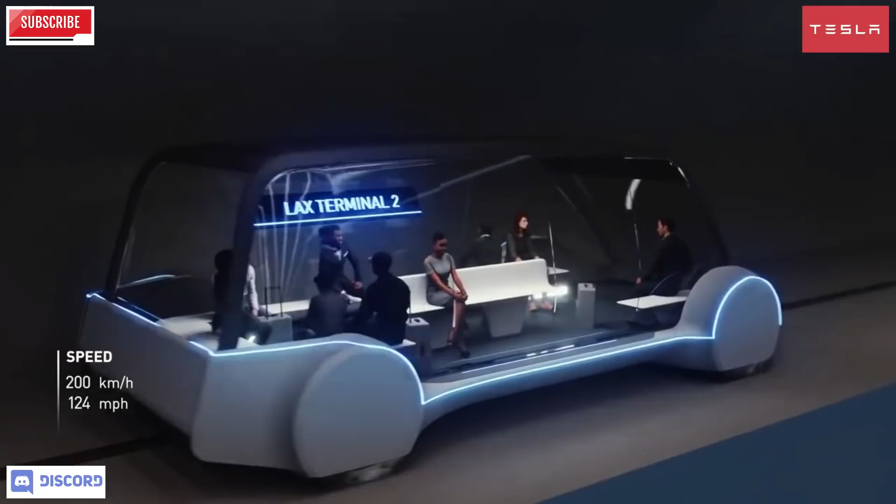I'm coming to you today with what could be my most explosive video of all time. It is a comeback video, and I am responding to a video that was made about The Boring Company by someone you may well have heard of. Let's have a look.

Yes, I decided that I needed to respond to this video. It's very important that I respond to this video in a very objective and fair way. Look at the information that has been provided by Thunderf00t and critique the areas that I believe are either misconceptions, mistruths, or just plain wrong. And I'm going to do it in a very, very fair way. Essentially what I'm doing today is I am poking the hornet's nest.

I have thought about this for a long while. Is this a good idea? Because this man here is a dangerous man. And in fact, I actually enjoy watching a lot of this guy's videos. You may have heard of him. His name is Phil Mason.

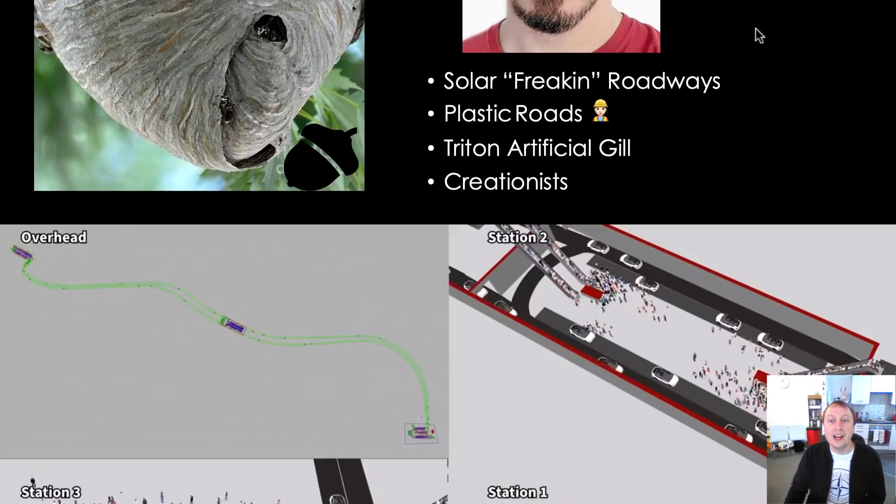Solar freaking roadways, what a terrible idea. Plastic roads, even worse. Triton Artificial Gill, and all his videos on creationists, which I really quite enjoyed. But he is not a fan of The Boring Company or Elon Musk, which is a great shame, really, because you know, he's a scientist, and you'd think that he might have some appreciation for what Elon Musk has been doing the last sort of 20 years or so.

So we look at the video. He says various things, and he shows this video here of the system, a simulation that I have seen on Twitter, but I've not actually talked about. So first of all, I looked at this and I thought, oh, there's that simulation that Phil Harrison produced on YouTube. And I looked at it and I said, oh look, there's, let's just mark it up.

Here's some Model X's. So straight away I can see from this that this is the second iteration of the simulation. So this is not the one that I have talked about, and this is not really what the system is. This is a stress test involving some modifications to the system, so it doesn't actually exist in reality. It's just a stress test. That's essentially what it is. So I've not really talked about this system because I just don't think that it's a good idea to really talk about theoretical modifications to systems.

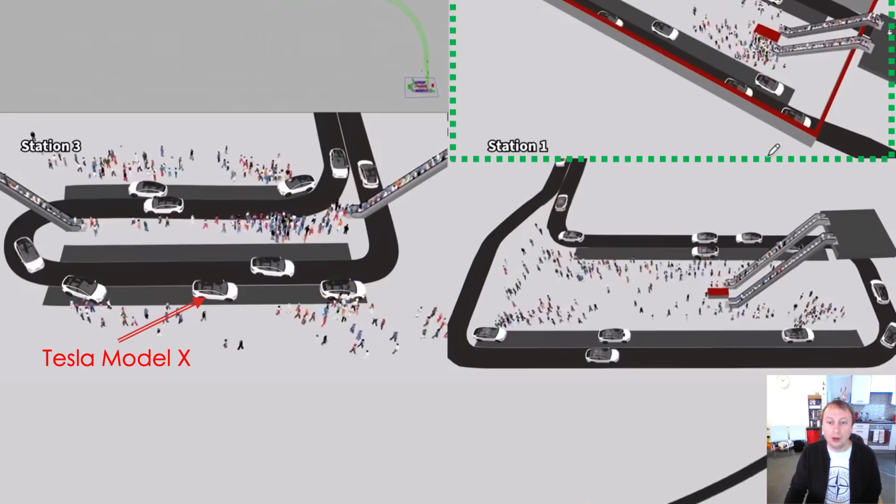What we should be talking about is what is actually being built in Las Vegas. So yeah, if you look at this one, as you can see, there are lots and lots of people here, lots of Model X's, and you've got 1, 2, 3, 4 escalators. Well, this is not the system that I was talking about in my video.

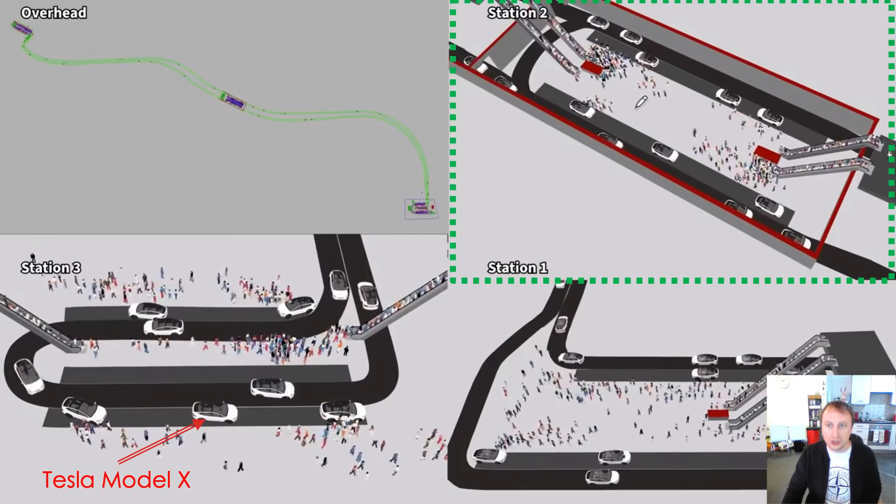And then Phil Mason has quoted me in his video as praising this system, which I have not done. I have not done that. So straight away he's misquoting me, because you can tell that this is a totally different simulation. These vehicles here are Tesla Model X's. It's a totally different vehicle in the system. The layout of the system is slightly different.

The speed limits in the system are totally different. So it's a mistruth what he's stating here, that I am praising the system that he is quoting. It's a totally different simulation. And if you don't believe me, here it is in black and white.

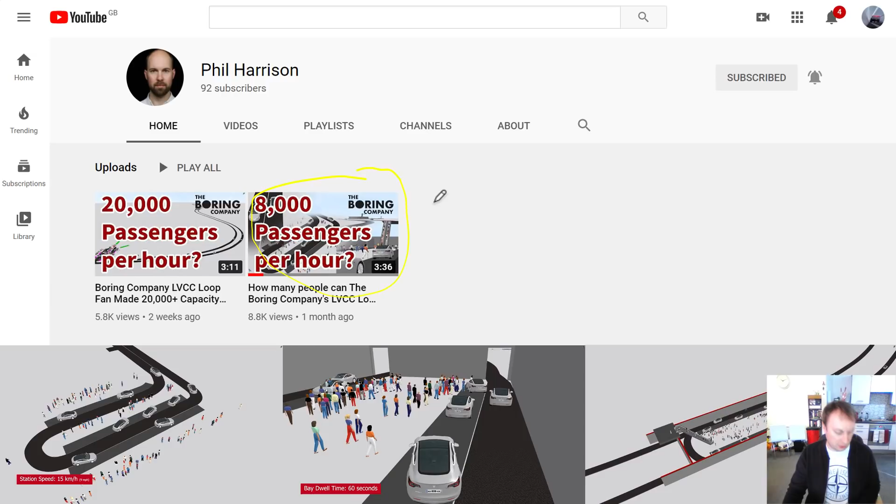So this is the system, or the simulation, that I have been talking about. And he's been talking about this one. So straight away, Thunderf00t is getting a little bit confused. Maybe he looked at that and he assumed they were both the same. I don't know, it might have been a simple mistake like that. Maybe he's trying to bend the truth.

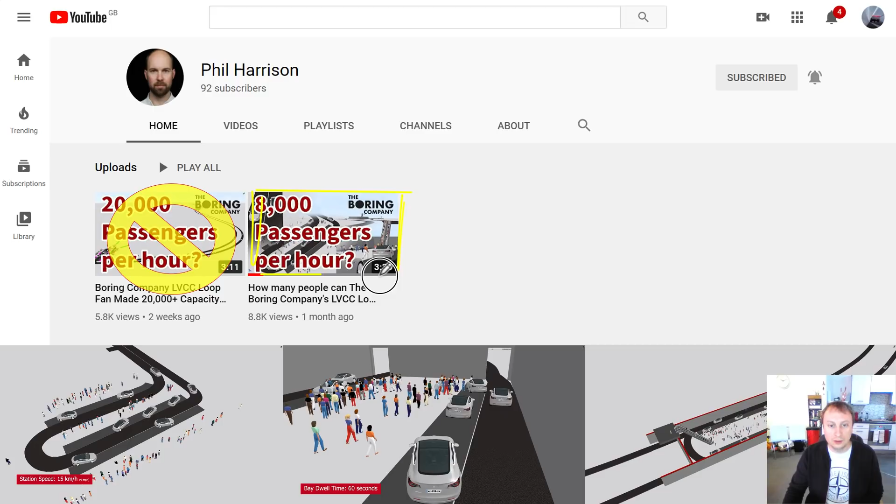I really don't know, I don't care really, because I have been talking about this system here. It's a totally different simulation. Okay, so we've got that out of the way.

So we're watching the video and I've noticed my face has come up and I'm like, I'm not sure really why I'm on this video. But then he brings up the simulation and he drops it onto Google Maps. And I'm looking at it, I think, okay, that's reasonable, that's 98% correct. There's a few, the designs have changed slightly. You're looking at something that's not quite up to date, but it's fairly up to date.

So that's good. So he's looking at this, and then he does something quite bizarre, really quite bizarre. He drops the marker on this road over here. He said, let's have a look and see if there's something we can take from real life and just compare it.

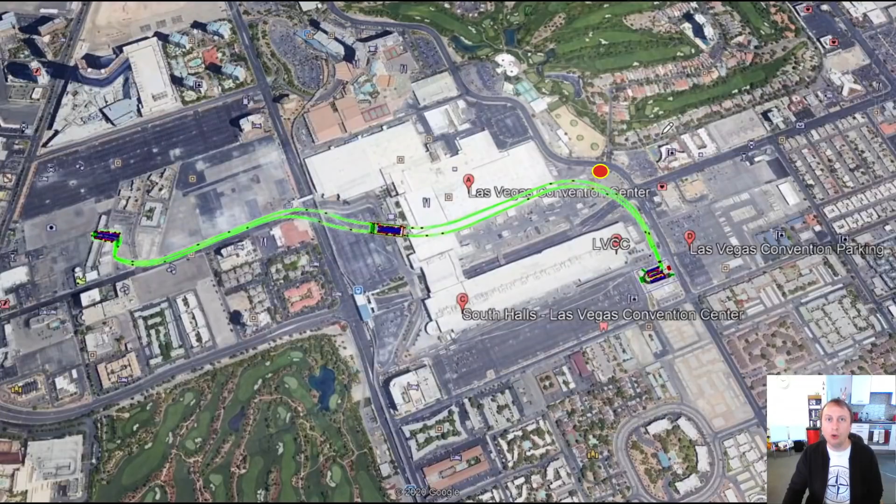And I just thought, are you comparing this road to this road? It's nothing the same, it's totally different. Look at the shape of the road here, it is far from straight. You're going from one curve into another curve. You've got a junction here, you've got a residential estate here. It's a very, very unfair comparison.

So here he is, he's put that on there. Where is our actual route of the Las Vegas people mover? Well, it is here. And then he drops his marker over here on Joe W. Brown Drive.

Well, that's not really a great example, really, because you've got two lanes of traffic. There's no separation in between them. There's lots of reasons why you wouldn't be driving fast on this road. And as you can see here, there is a junction where people are going to be turning left and right. It doesn't really bode well to have a high speed limit in this particular area. So it's just a poor example of a road to compare it with.

Then, this blows my mind, this bit. He starts quoting the speed limit sign here. Well, the speed limit sign generally doesn't come about because people do a study of what the maximum velocity you can go down this road at. It's nothing to do with that.

They're working out the worst case scenario. What they're looking at is what happens if there's low visibility, what happens if there's a truck or a bus going down this road, what happens if the road is icy, what happens if there's pedestrians crossing the road, what happens if there's cars going through red lights and things like this. So the worst case scenario, all these things are potentially going to happen, so they take the safe approach and set the speed limit at 25 miles per hour, which is probably sensible for this particular residential area.

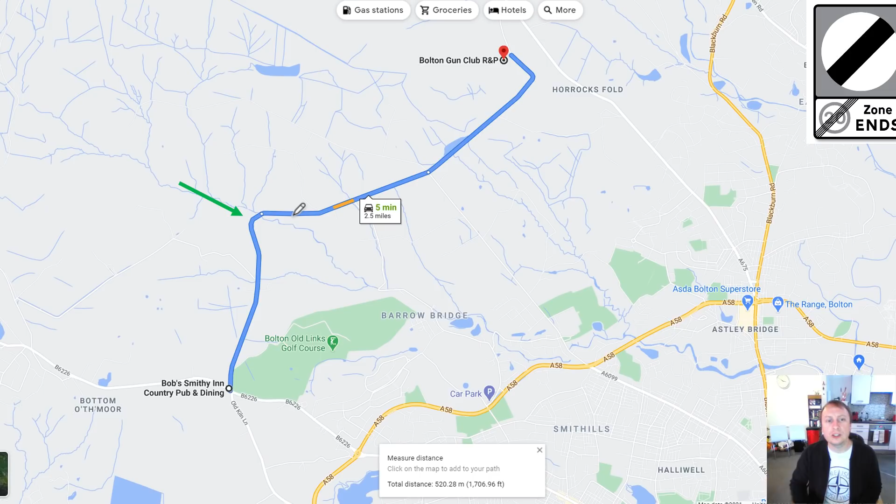So first of all, we need to calculate what is the radius of this curve here? Well, it's quite difficult to pull off Google Maps, although Phil Mason kind of did that in his video, so we're just going to copy what Phil Mason did. So this is Walker Fold Road in Bolton. As you can see, I've dropped a square on here, and each side of this square is 45 meters long. Then I'm going to calculate the radius of the curve here on Walker Fold Road.

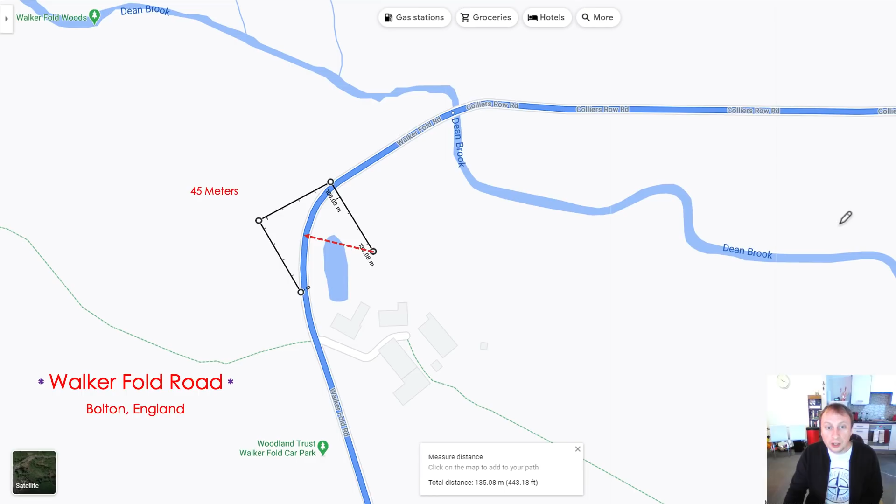Then I'm going to tell you about the speeds that I go around this corner, like every other week, if not more often than that. So looking at this, we dropped our square on there and calculated the radius of that curve. I'm pulling off around 41 meters, but just to be safe, because the markings are not quite as accurate as I'd like them to be, it's around 43 meters in radius for this particular curve. So it's not excessively tight, but it's fairly tight. It's a good curve, and I go around this fairly often, and it's national speed limit along this area of road.

How fast can I go round this road? Well, I did this two days ago. So what I did was, first of all, I went round it at what I thought was a sensible-ish speed. So I went round it around, let me change my pen.

So I did 36 miles per hour to begin with. That's not great, is it? I went round that corner, 43 meter radius, at 36 miles per hour.

So then I tried 40 miles per hour. Absolutely fine, I went round the corner just fine, no issues with the back end of the car. My car is not some kind of sports car, it's just kind of your general run-of-the-mill sedan.

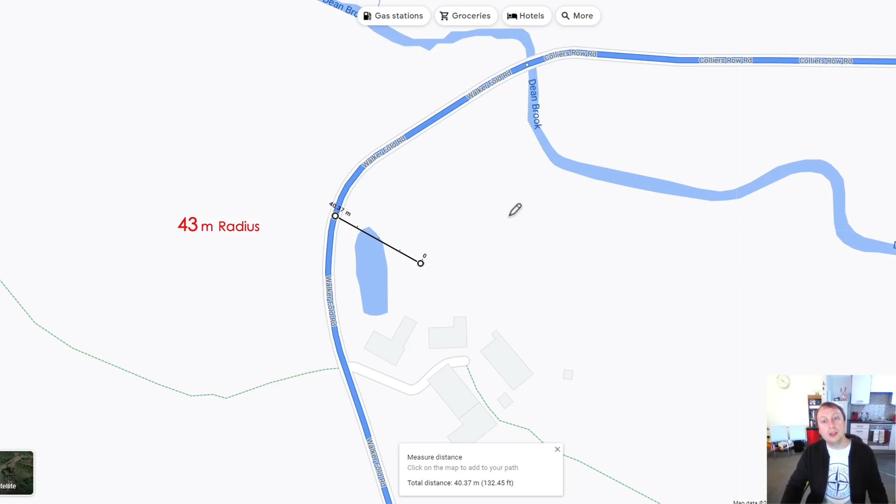So I think for a corner like this, around 42 miles per hour is not too bad. 42 miles per hour at a 43 meter radius - you can pull off numbers from that. I think 42 miles per hour for this radius of corner is very safe, and I'd be happy doing that. And remember, the actual system here in Las Vegas is going to use a very high performance vehicle. The tires on that vehicle are going to be super grippy, and the actual road deck is going to be very, very dry.

When I was doing these tests 2 days ago, it was icy and wet, so maybe I could go a bit faster, but I didn't want to risk it. Also, the traffic is segregated and the route is known, so the speeds you could do in this system are going to be quite high, even compared to motorway standards.

So let's have a look at our route map. Here's our updated route map, the most recent one. As you can see, I've drawn our triangle, our square here, which I'm going to extend like this. So I've drawn our square on here, and what we want to do is calculate that there.

We want to calculate what the radius is of that curve - is it going to be more than the curve at Walker Fold Road? That's the question. I'll have you know, it's a lot more. A lot more. So when Phil Mason comes on and says, hey, you can't go around this corner, it's going to be very tight and very uncomfortable, and it's potentially dangerous, and I'm not sure they're going to do it...

Well, when he says things like he's not sure, he actually is not sure. I can tell you the numbers today, and the numbers today are very, very good. So let's first work out the radius of this corner. It's about 260 meters vertical, and then we do another 260 meters across here, and that drops us on our square here, our perfect square at the Las Vegas Convention Center.

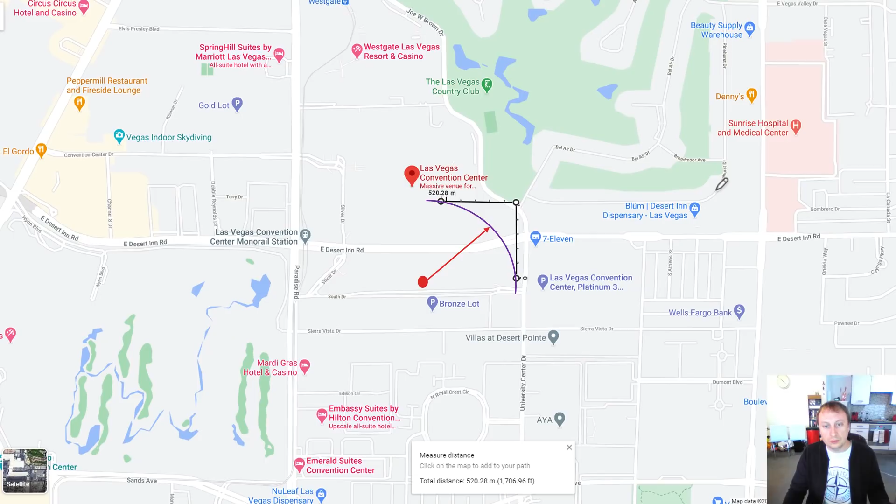So what is the radius there? What actually is it? We know we can go around the corner at 42 miles per hour - that's a 43 meter radius. This is a 260 meter radius, and I'm very confident that's accurate to within 2 to 3%. So it's somewhere in the region of 254 to 266, something in that ballpark.

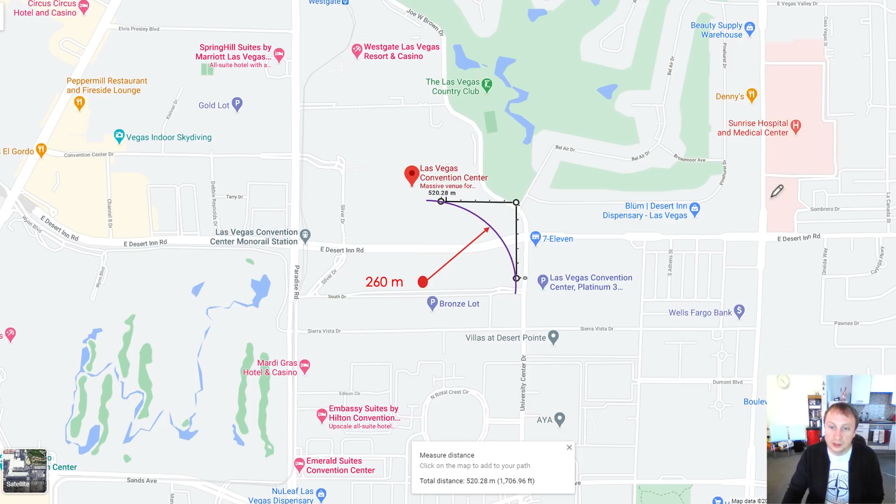So 260 meters - that means you're going to be able to go around the corner at quite high speeds, because remember, you've got a high performance car, high performance tyres, so they're very grippy, a very grippy surface, and you don't need to worry about weather conditions because the tunnel road deck is going to be very, very dry. So all those things add up to some high speed running through this system.

Here's a quick criticism of this system, because I'm going to try and be objective and fair here: this system is not long enough. I would much rather have a system that's about 1.1 miles long or 1.4 miles long - there's a lot more you could do with a system that long. That would increase the top speeds a lot more, and you'd do a lot less braking, so you'd have less wear and tear on the brake discs. Even with regenerative braking, you're going to have to use traditional brake discs on this system.

The problem is no one on YouTube and no one in the media has any idea what the top speeds are going to be on this system in Las Vegas. Today, I'm going to tell you what the speeds are going to be at various points. I don't know if you can see these dots here - these little dots indicate vehicles.

These vehicles are traveling through the system. We've just taken a snapshot of the actual top speed that these vehicles have reached at this point in the system. So these can be individual vehicles all using the system at the same time. It doesn't really matter. For this example, and I'm going to be crystal clear with you, this example involves going from station 1 here to station 2 here.

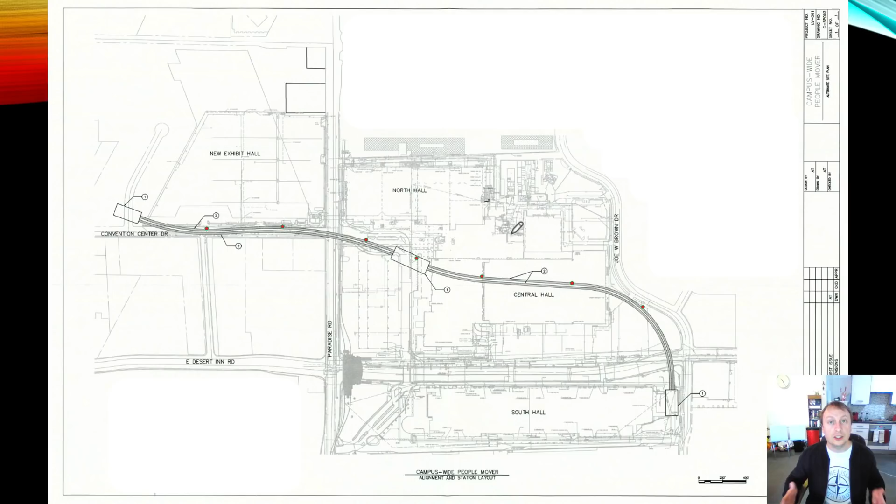Passengers are fed into the vehicles via stewards. So you've got 4 or 5 passengers, and they're loaded into the vehicle. Once that's completed, the steward clears the vehicle to leave, and then it has a window to exit the station in a safe way without worrying about cars going through.

So we've gone a bit off track there, but I'm going to tell you now about the various speed limits at these various points, okay? This is the direction of travel. It's not stopping at station 2. Here are our indicators where the cars are.

This is what the speeds are going to be at these various points in the system. As you can see, it gets just beyond motorway speeds. The reason it's not super high is because the system is quite short, unfortunately. This is the best that you could do. If this was done with a train, for example, and I'll come on to trains in a moment, the top speed in the system would be around 30-35 miles per hour, maybe 38 at best, because trains have to stop and start all the time, very heavy, and acceleration's not amazing.

So using Tesla vehicles is the best way to run a system of this size. As you can see, when this vehicle is coming around this corner here, in this area, it's getting up to 48 miles per hour. As it's coming out of the corner and hits this straight here, it's going to be able to get up to about 68 miles per hour, 65 miles per hour, that kind of ballpark.

It maintains that speed along here, and then as it gets up to here, it begins to slow down. As it enters the station, its speed is limited to 22 miles per hour. It's passing through the station, so it's not going to be going excessively fast. In the event that something goes wrong at 22 miles per hour, the vehicle can stop quite quickly.

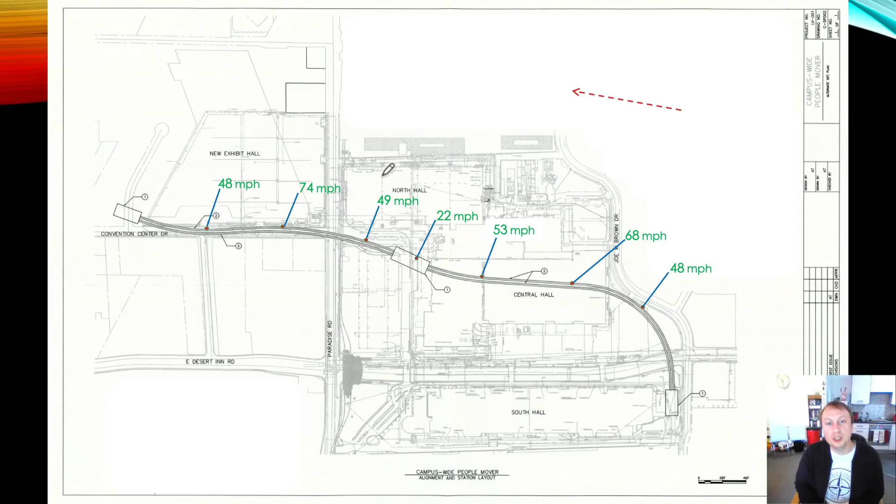Okay, so I think that Phil Mason doesn't talk about speeds - he doesn't mention... in fact he does actually. He puts on his video title that maybe 40 miles per hour is possible. Well that's fucking stupid, because as you can see we're going 48 there, 49, 53, 68.

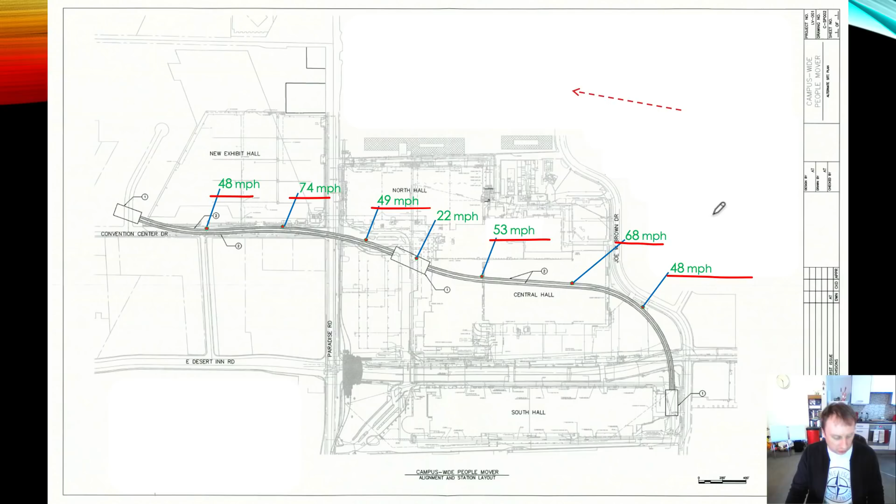So and 48 here as well. So most of the system is well above what he's predicting it will be, and there'll be lots and lots of vehicles going through the system at any one time. So we've dispelled that myth - it's a fallacy that the curves in the system are restricting the speed to very low levels. We know that now based on what I've just told you.

Now he puts this graphic up, and I have a lot of problems with this as well. First of all, how would this fit inside the Las Vegas loop system? So the platform at Station 2 is about 400 to 500 foot long, maybe slightly - let's say 450. This train is a lot longer than that. Each one of these carriages is 80 foot long, maybe 70 foot. So you'd have to extend that station.

Also, you're never going to run a system with one train. How would you run a system with one train? You'd at least have 3 trains. So these numbers are not really too accurate.

Another thing to remember is that one car can probably drive through this system twice before this train has even got to the end of the track, almost. Because you've got to remember, these trains take a long time to accelerate. They don't turn around - they have 2 driver's cabs, one here and one here. So when you get to your end destination, you're straight away going to lose 45 seconds. The train driver has to get out, walk all the way down, set up his cab, check his systems, open his window, and by the time he's actually put his key in and started the train, that's 45 seconds gone.

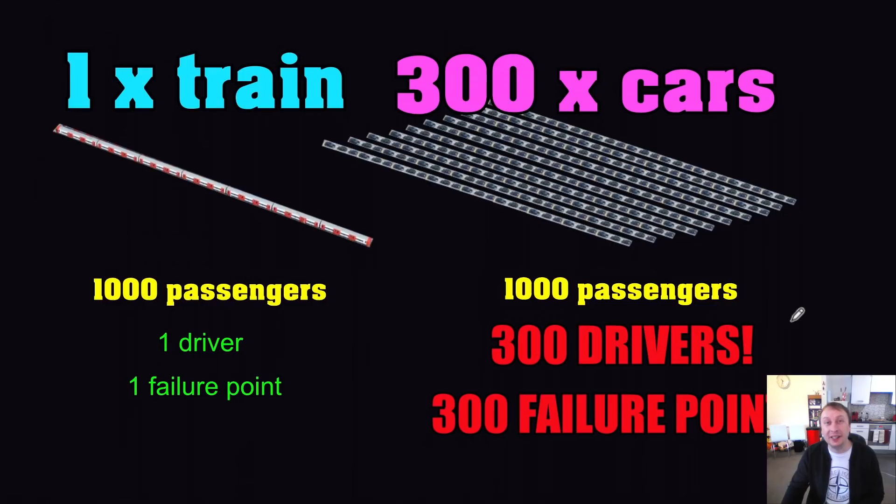And when they do occur, they may be months and months apart. So again, I'm not sure that's a great way of looking at it. But I can understand that yes, cars can go wrong, things can happen, and you could potentially have issues. But it's going to be so rare that it's not really worth factoring that into your argument, to be frank with you.

So what really are the numbers here? If we were going to compare it, if we were going to do kind of a train system that compares with what the Las Vegas loop is attempting to do, you'd probably divide this train up into maybe you'd do that, and then you'd add an extra carriage on as well.

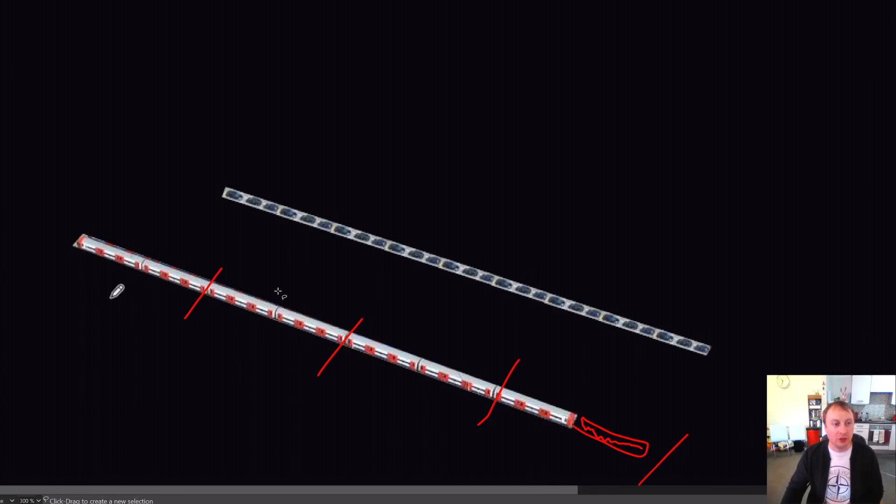So you'd have 4 trains. So really, in reality, if you're trying to compete with this and you're trying to do it with trains, you'd have 4 metro trains or 4 trams. So you'd need 4 drivers.

Yes, I know these vehicles initially will technically have someone sat in the driving seat. They will not be driving the vehicle very much. It will be on autopilot 98 to 99% of the time. In September of this year, autopilot will take over all driving within the Las Vegas loop. That's a well-known fact, that drivers will not be needed after September.

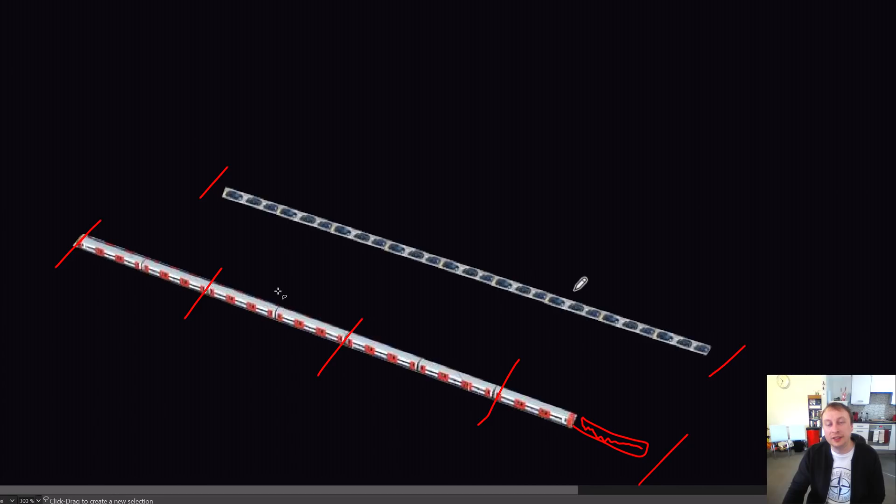So let's just assume that it is September and all these cars have autonomous systems installed, level 4. Well, really, you only need around, let's say 72, let's say for safety, let's say 74 vehicles. But you'd need 1, 2, 3, 4 trains. So again, that is a much more fair comparison.

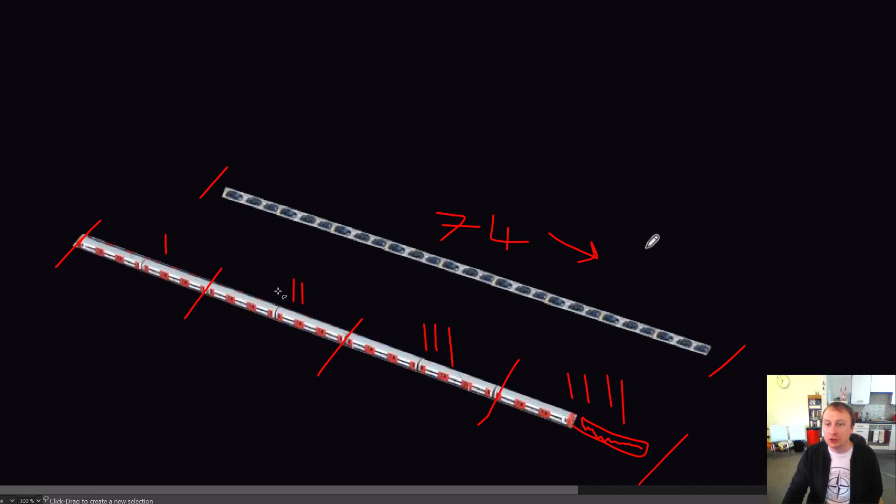How do we get this 74 down? That's another good question. How do we get it down to around 50? So that would be a better number for us, wouldn't it?

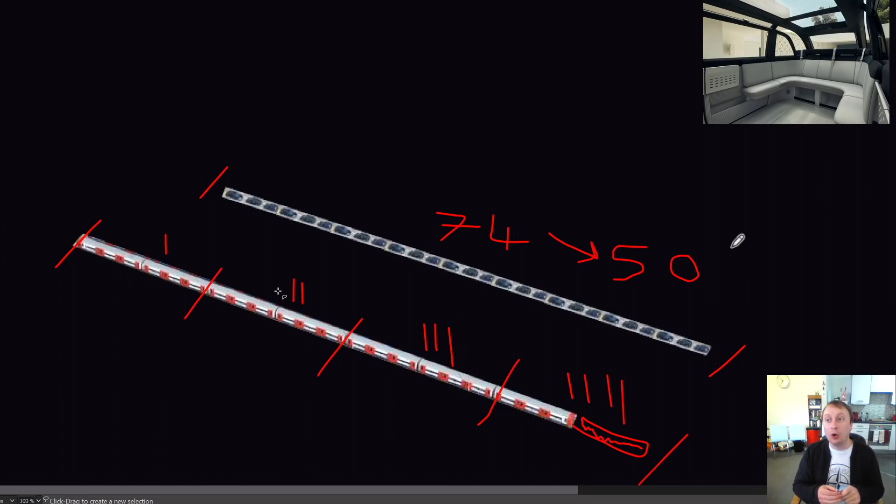Well, what you do is you introduce a vehicle with more seating. This is an example of a vehicle that I've shown in the past, and potentially you could have a vehicle that seats 8, 9, maybe 10 passengers, and that will be developed in the near future with nice doors like this so you can get in at the same time.

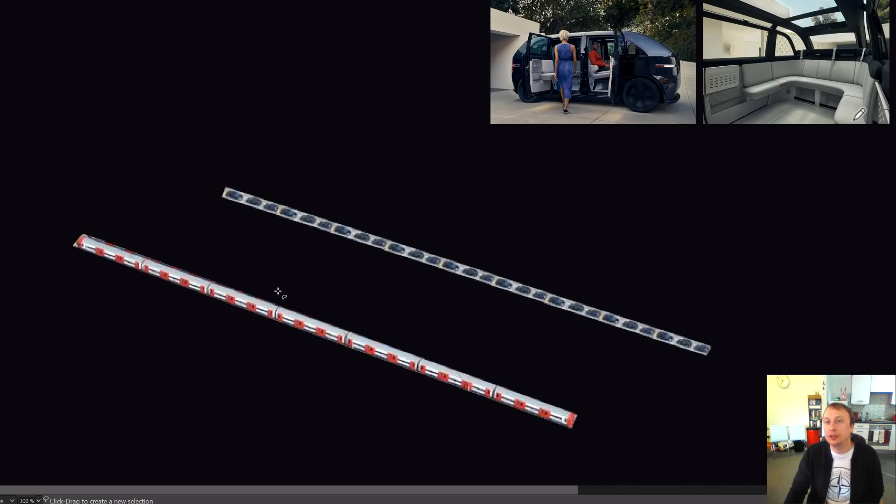It's not great. It's not great. I'm not going to lie.

So I don't really like that. Then he quotes, I'm really getting kind of fed up of having to explain to people that this article is total, utter rubbish.

Regulations are there to protect people, but regulations can be circumvented. If you can prove that the danger is not there, and there are applications within that regulation to go around certain issues, then these kind of idiotic statements, it's not true.

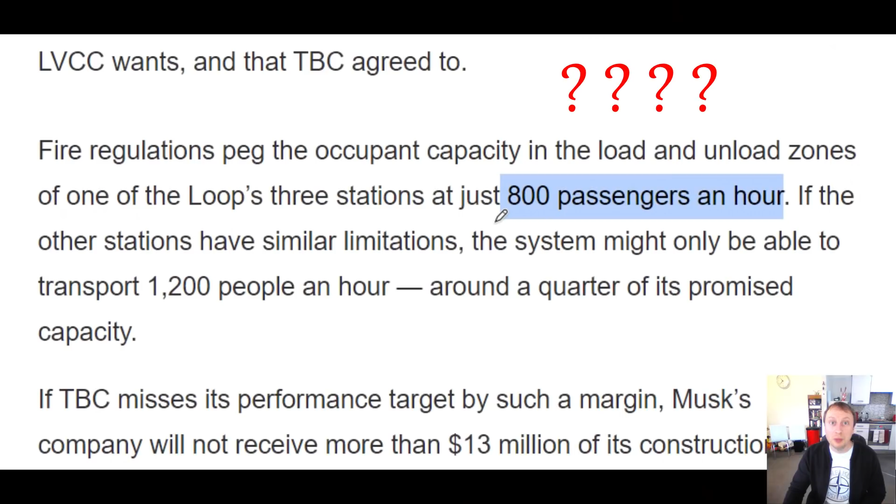That these regulations do not apply to the Las Vegas loop, and they have not been applied because there's no reason to apply them. And the main reason is 2 of the stations are open air, so there's no possibility of anyone breathing in smoke.

Also, in the event that a vehicle does catch fire in the tunnel, there's a massive sprinkler system, and people can just reverse the vehicles, because after about 20-30 seconds, this is going to put out pretty much any fire, and this thing can go for a full hour, dropping gallons and gallons of water onto the car.

I'm not worried about flashovers, I'm not worried about fires, and I'm not worried about regulations that don't even apply to the Boring Company system in Las Vegas, because that article was total FUD.

It was not based on reality. It was based on one person's opinion, and those regulations are not being applied, and we know they're not being applied to the loop system in Las Vegas. And they're not necessary. Why are they there? What is the point in saying they must only have 800 people when there's no risk of fire, because all the possible ways that you can eliminate the threat of fire have been taken?

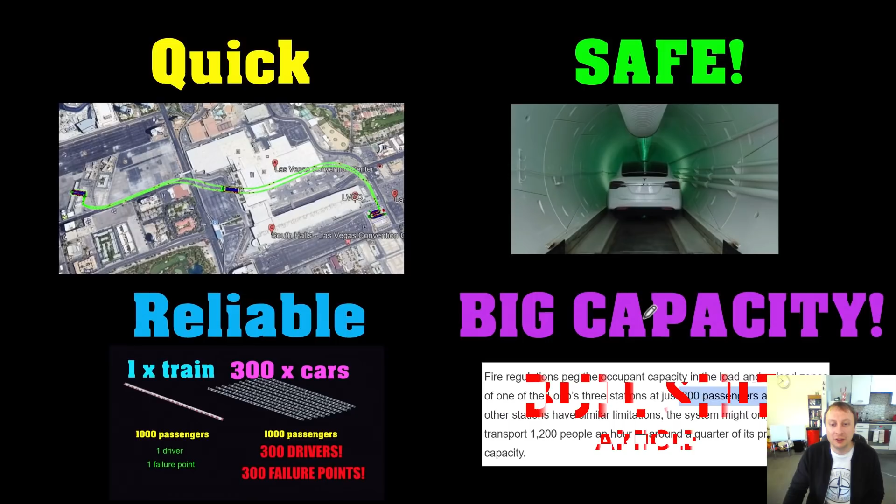So anyway, it's silly. So then this comes up, and this is just silly again. I don't know what to say to this. It is quick, it is safe, it is very reliable, and it meets the capacity requirements of the Las Vegas Convention and Visitors Authority.

They have agreed that we want a capacity of 4,400 per hour. So the Boring Company built a system that meets the requirements. It's doing what the customer said. We want 4,400 per hour. The Boring Company said, here you go, here's 4,400 per hour, and we gave them that. We don't need to give them more than what they're asking for. So let's just address this.

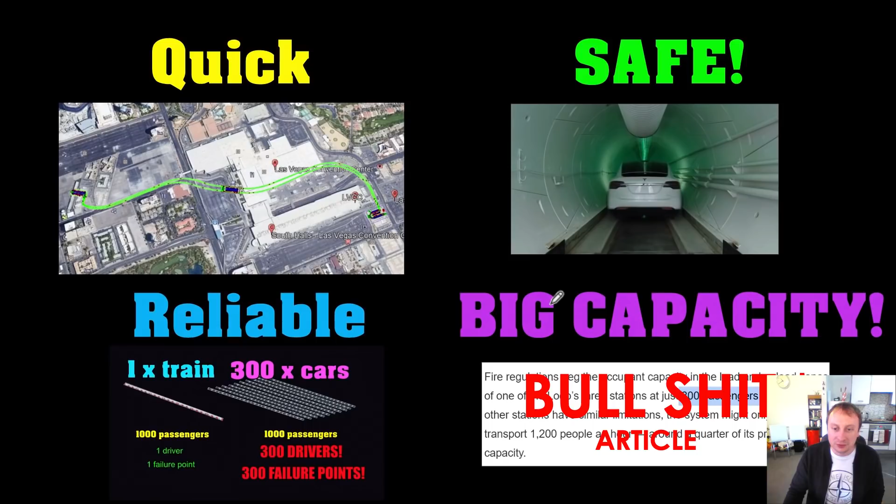Vehicles are going to be moving through the system. If you average the speeds over the 0.827 miles, it's going to be around 54 miles per hour. If you tried to do this with a train, the average speed would be a lot less, closer to around 20. So it's more than double the speed of a train. Already, we've beaten the trains with speed.

We've beaten them in terms of the speed of construction, and we've beaten them in terms of the cost of the project. So I don't need to keep saying this, but I will keep saying this: this system is better than any other solution ever proposed. If you think you can make a better solution, go on, make a video about it and tell me about it, and then I can rip you to pieces. But this is the best system. A train system would cost at least $170 million, if not more. And it would also be quite slow, and it would take 2.5 years to build, if not longer. So that's that.

Safe. I can absolutely guarantee you there will be no deaths, there will be no serious accidents, and there will be no serious injuries in the first 3 or 4 years of its operation. Absolutely guarantee that to you. Now, I can't guarantee that at some point in the next 70 years there isn't going to be some kind of strange accident that happens, but there's accidents every day. 30,000 people die in road accidents in the US every year.